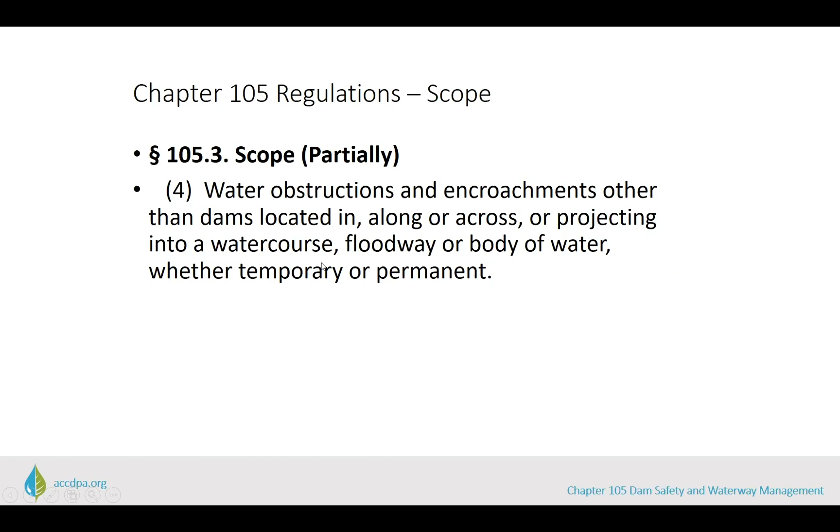So we've heard the term several times now. It's time to really get into the definitions. Water obstructions or encroachments: anything that would change the course, current, or cross-section of a body of water. All water obstructions are encroachments. Some examples are listed: culverts, fill, walls, etc.

However, the definitions and the regulatory scope also cover things that are strictly encroachments: excavations, clearing, grubbing, dredging. They're not structures or obstructions, things that take up space, but they do alter the normal stream morphology and change the course, current, or cross-section of a watercourse, floodway, or body of water.

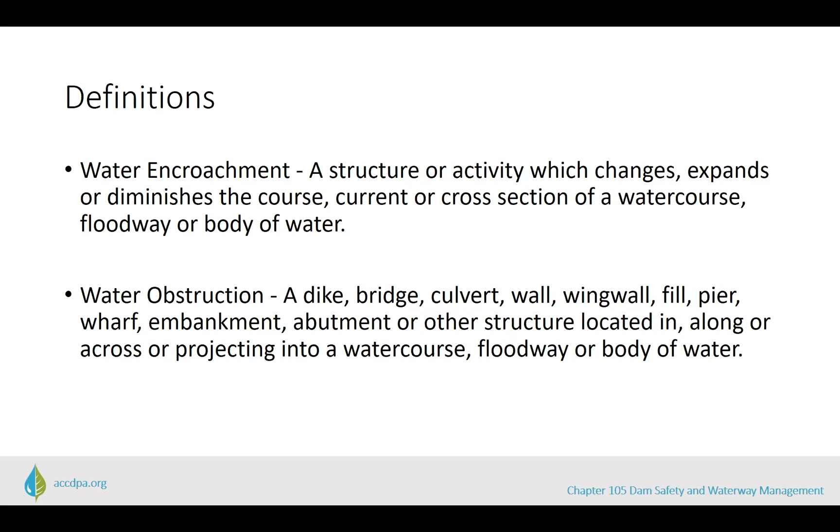More definitions. I often hear, and I'm sure my coworkers do too, 'I have a ditch on my property,' or 'there's a runoff channel along the road,' or 'there's a dry creek bed.' There seems to be a wide variety of views of what really constitutes a stream in Pennsylvania. But from the perspective of regulatory purposes, there is a definition of a stream. Chapter 105 has a one-word definition: watercourse. Watercourse is further defined as a channel or conveyance of surface water, having defined bed and banks, whether natural or artificial, with perennial or intermittent flow.

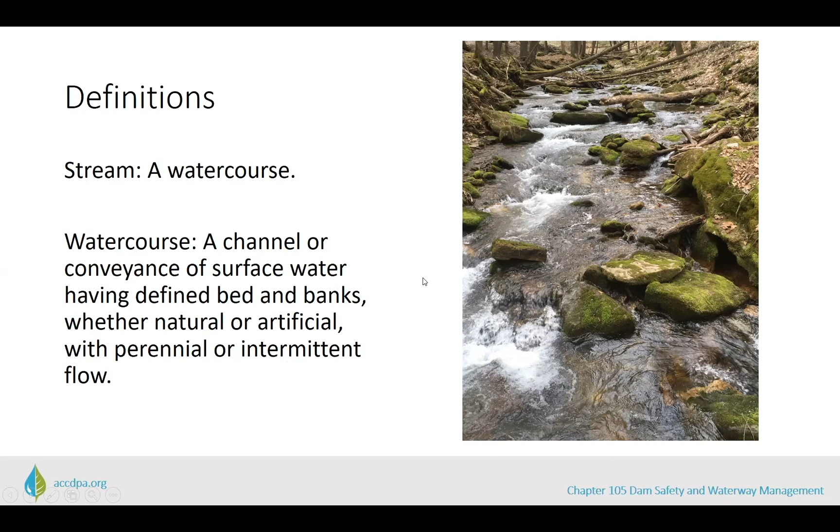I think we would all agree that the picture on the right, this higher gradient mountain stream, people would agree pretty much universally that that's a stream. However, these features are also streams per Pennsylvania definitions. There's defined bed and bank, conveyance of water. Maybe these are natural, maybe these are man-made. These aren't particularly aesthetically pleasing streams. They're not recreationally important or large, but they are streams per the 105 definition. Again, the regulated definition of streams is very broad.

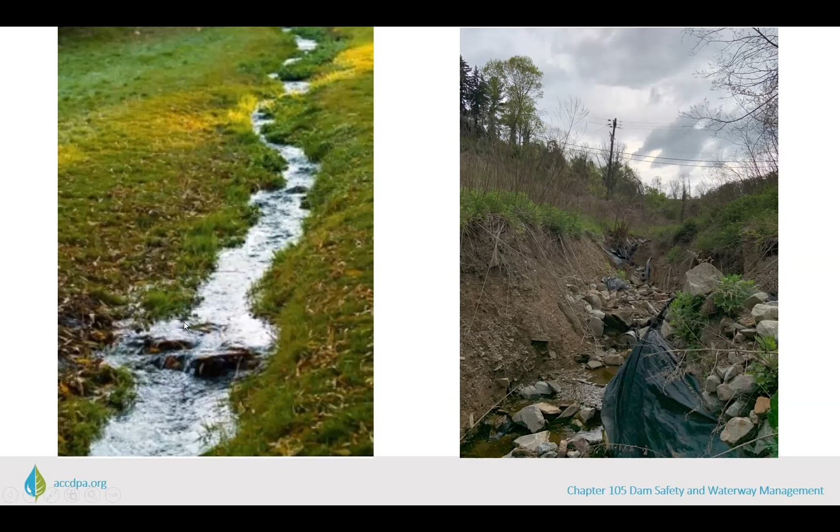Finally, last definition: wetlands. We often get questions on whether or not a property contains wetlands, or 'here there are some cattails in my yard, I don't think it's a wetland though.'

There are specific indicators and methodologies for determining if an area is wetlands that have been developed by the U.S. Army Corps of Engineers, and they're geographically specific. Western PA is in the Eastern Mountains and Piedmont region. Three specific metrics—soils, vegetation, and hydrology—are evaluated. A wetland area must have, under normal circumstances, positive primary indicators for all three of these metrics in order to be considered a regulated wetland area.

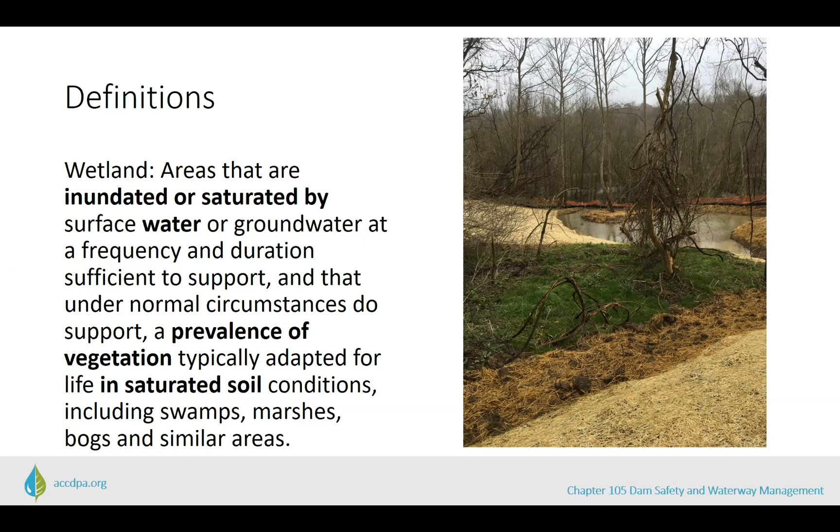This figure helps demonstrate the areas of a stream that Chapter 105 regulates: the channel itself from top of bank to top of bank, and the 100-year floodway. Any obstruction or encroachment in this area—anything that would change the course, current, or cross-section of that area—would be regulated by 105.

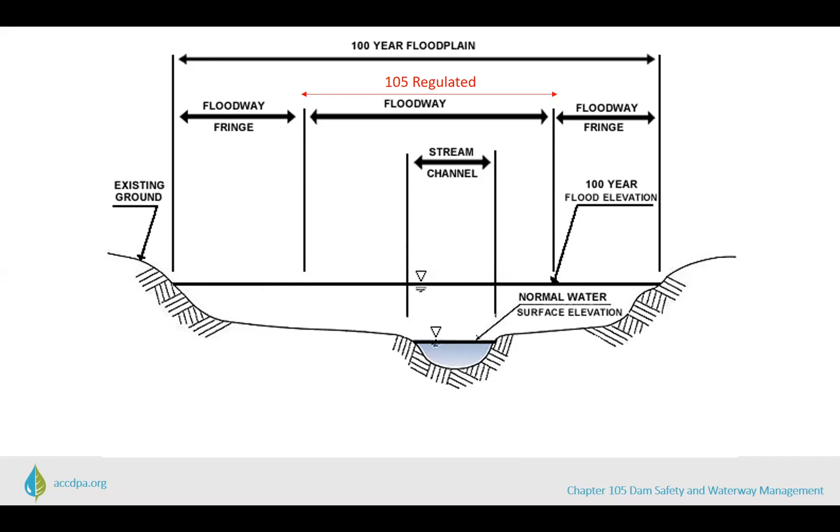Not shown in this diagram are wetlands, which are regulated regardless of proximity to a stream or flood zone. They can be upland, away from any other water feature.

Okay, so we've discussed scope, purpose, and definitions. Let's dig a little more into purpose. Why would the Commonwealth of Pennsylvania and the Conservation District, by the delegation agreement, regulate obstructions and encroachments? We'll look at the Conservation District 105 delegation through this more focused lens later.

So first, some quick review. The purpose of the regulations is to protect health, safety, and property of people, as well as water quality and environmental rights.

Dams are giant examples of water obstructions. Did you know that 2 of the 10 costliest dam failures in U.S. history have been in Pennsylvania? And they're not number 8 and 10 or something like that—in the entire United States, the number 1 and number 6 costliest dam failures have been in Pennsylvania.

The Johnstown flood in 1889 remains the costliest dam failure in terms of human life lost in the history of the United States. 2,200 people lost their lives and approximately $500 million in damage, in 2016 dollars. The site of the South Fork Fishing and Hunting Club Dam on the South Fork of the Conemaugh River is now a national memorial you can visit.

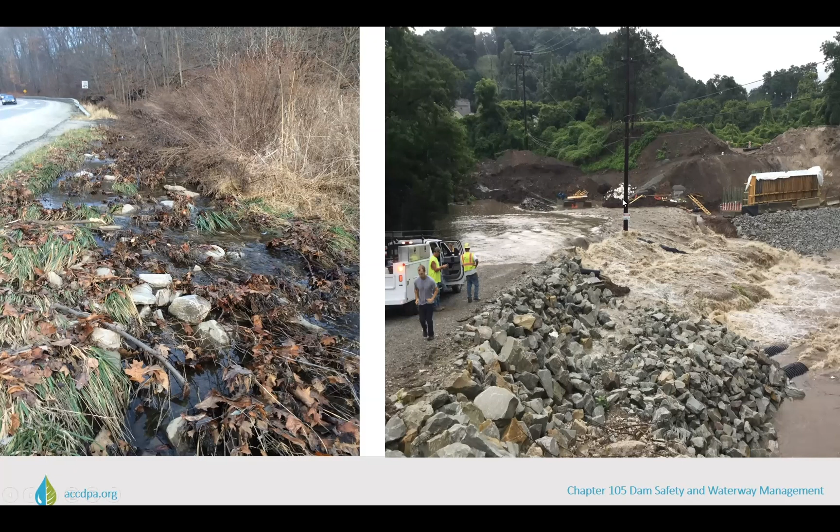As I mentioned in the introduction, the Conservation District has a delegation agreement with the State Department of Environmental Protection to administer certain aspects of the Chapter 105 program. Our current delegation agreement was signed in December of 2016. It's a formal document outlining responsibilities of ACCD and DEP. The state DEP maintains concurrent power and duties to conduct responsibilities of permitting and enforcement for delegated programs.

Essentially, the Conservation District's obligations cover three areas: permit reviews, complaint and permitted site inspections, and outreach and education. I'll spend the rest of the webinar looking over these three areas of our delegation agreement.

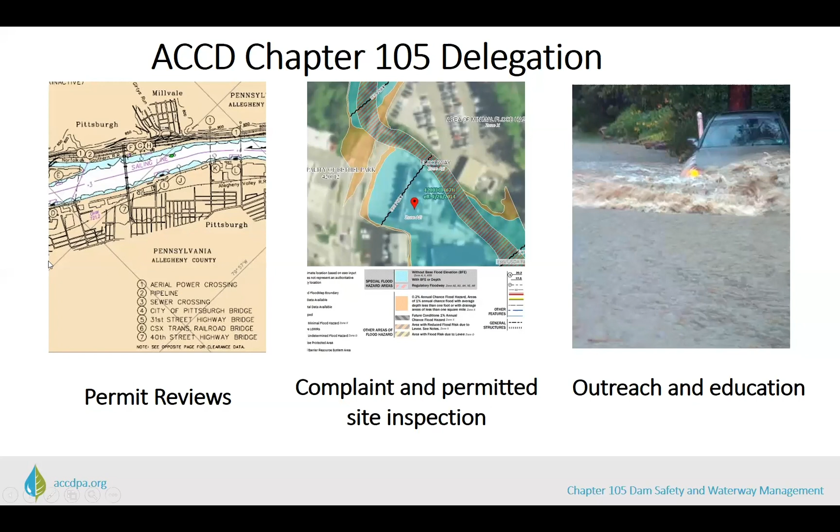We know that Chapter 105 regulates obstructions and encroachments. Under 105.11 permit requirements, broadly speaking, a person cannot construct, operate, maintain, or abandon a dam, obstruction, or encroachment without first obtaining a written permit from the department.

Water obstructions and encroachments come in a wide variety of project types: bridges, utilities, dams, docks, marinas, retaining walls, flood control projects, the list goes on and on.

The regulations are organized in subchapters that set forth requirements for different project types. For example, subchapter C covers culverts and bridges, with specific requirements for designing, permitting, and building culvert and bridge crossings. Subchapter I covers commercial dredging operations, with specific requirements for designing, permitting, and conducting extraction of sand, gravel, or other minerals within a river or 105 regulated area.

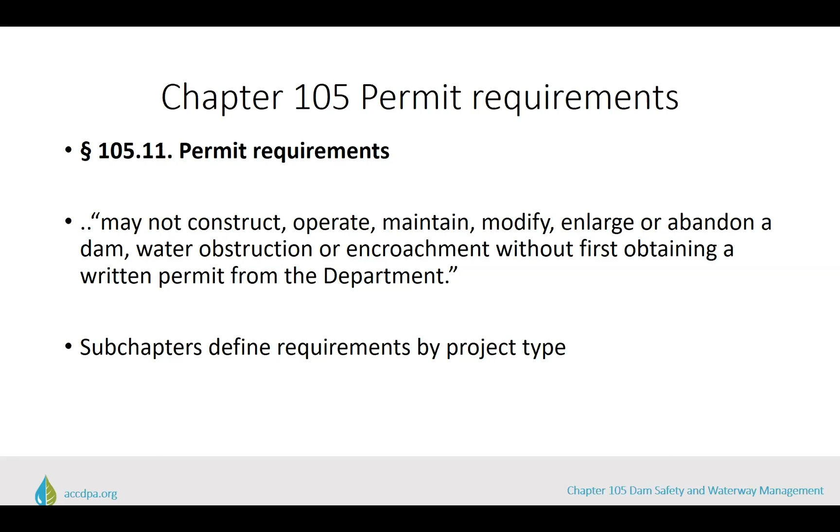The Harrisburg central office of DEP, the Bureau of Waterways, Engineering and Wetlands, Division of Dam Safety, reviews dam permits for the entire Commonwealth. Regional DEP offices, Bureau of Waterways, Engineering and Wetlands, review joint permit applications and certain general permits. In the joint permit with the U.S. Army Corps of Engineers, the Corps is the federal entity that regulates discharge of fill material to waters of the U.S. under Section 404 of the Clean Water Act.

We are in the Southwest Regional Office, headquartered in Pittsburgh, covering 8 southwestern Pennsylvania counties. Certain mining and oil and gas DEP offices will review 105 permits related to mining and oil and gas for their respective industries.

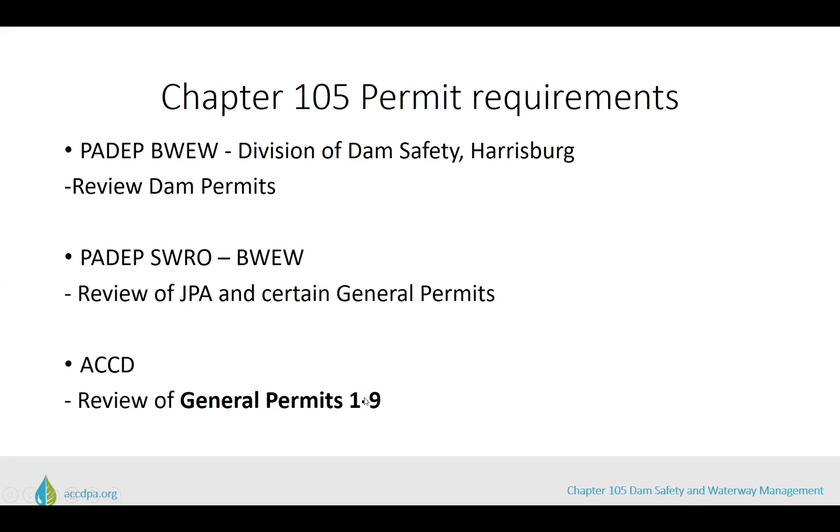Under our delegation, we review a subset of Chapter 105 general permits, general permits 1 through 9. Subchapter L outlines DEP's authority to develop and issue general permits for projects that are similar in nature and can be adequately regulated with standardized specifications and conditions. So to receive acknowledgement to use a general permit, an applicant provides information showing they meet all standardized specifications and conditions for a project to be covered.

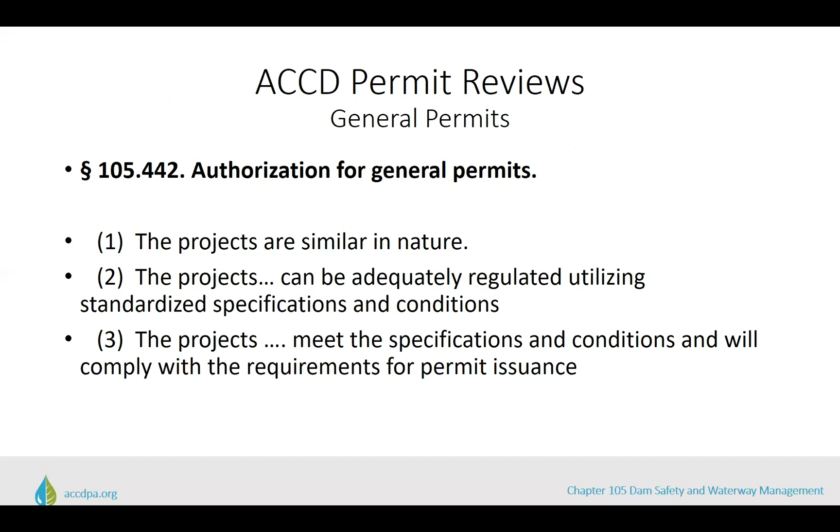Across all of these permits, some conditions apply uniformly. For example, all permits bar in-stream work from March 1st to June 15th in streams stocked with trout by the PA Fish and Boat Commission. The state, through angler dollars, spends money and invests in trout fishing opportunities, and permits bar in-stream disturbance during that time. Also, all permits require developing and implementing an erosion and sediment control plan, approved by the local conservation district, to minimize accelerated erosion during the project.

In addition to the uniform permit conditions, each individual general permit has specific conditions to the activity. For example, the GP5 utility crossing has a condition that for utilities placed under streams, they must have at least 3 feet of minimum cover from the top of the utility to the stream bed. In the event of a heavy storm and any down cutting in the stream bed, the extra cover provides a safety buffer so the utility isn't damaged by the storm. Also, environmentally, whatever is in the utility would not leak into surface waters.

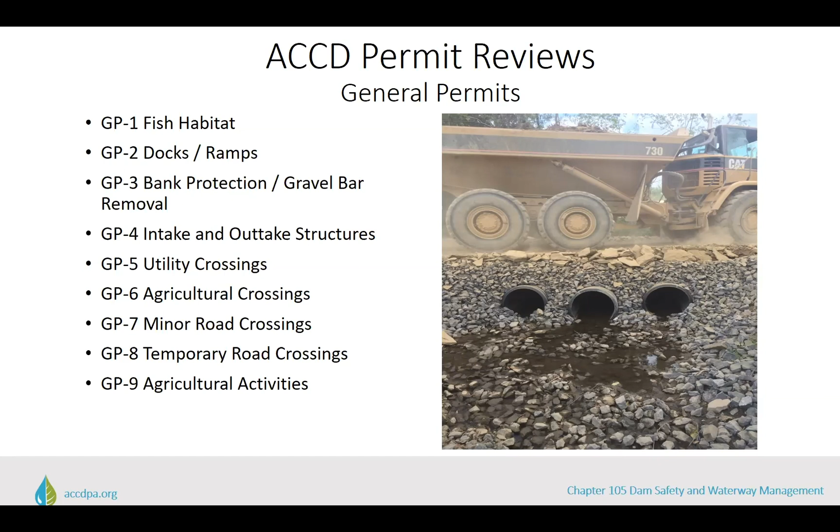Generally, the components of a general permit submission include an application form, location map, project description and purpose narrative, site drawings, E&S plans, and a threatened and endangered species search. If the proposed project were to impact wetlands, a wetland delineation must be provided.

So once received, once we get a permit package in our office, our reviewer would review the proposed activity, the drawings, the specifications, the cross sections against the standardized and uniform conditions to evaluate whether or not it could qualify for GP coverage. If it does not, the applicant must seek either a joint permit, another general permit, or a dam permit in some cases.

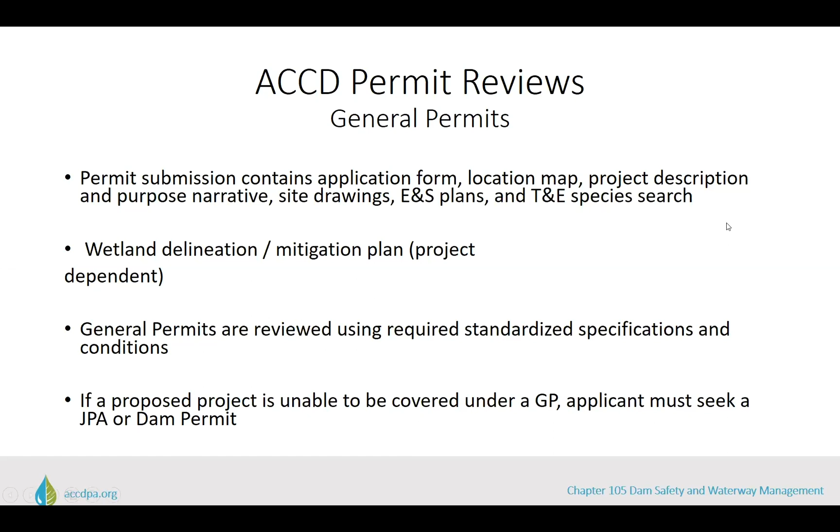The next part of our delegation I'll talk about is our complaint and permitted site inspections. During permitted site inspections, we're looking to make sure that the conditions are being followed, the E&S plan is being followed during construction. For complaint sites, we first have to evaluate whether or not there is any 105 violation occurring and what those violations are and detail them.

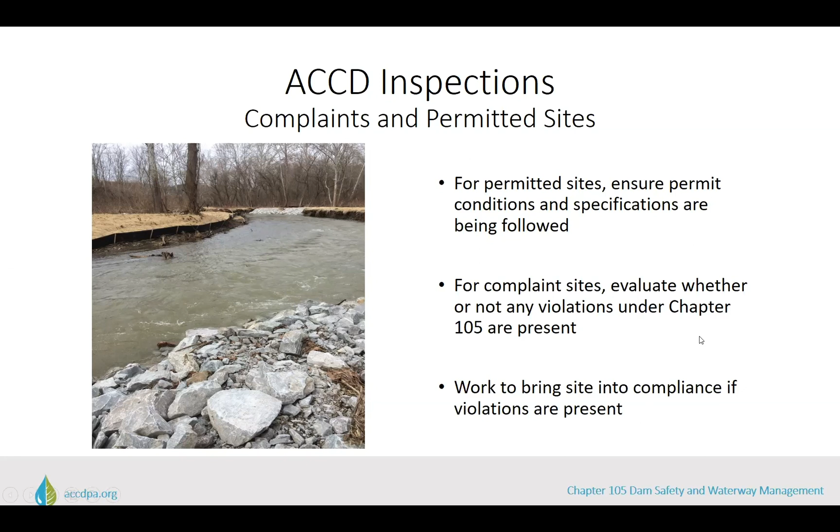If there were no violations in either case, we provide written notice with an inspection report stating as much. If there are violations, we provide written notice to the responsible party with a formal inspection report and work towards voluntary compliance to have the issues addressed. If voluntary compliance cannot be reached, we work with the regional DEP office on various enforcement strategies to bring the site into compliance. I'll just walk through a few examples of 105 inspection sites that our office has been involved with over the years.

This was not permitted. We wouldn't permit something like this. Somebody proposed this, it wouldn't pass muster. It is an obstruction, right? It's right in the stream channel and it's causing property damage, the parking lot and building, safety and environmental issues. So we did an inspection, met with the owner, and explained their obligations, gave them a written inspection report detailing compliance measures.

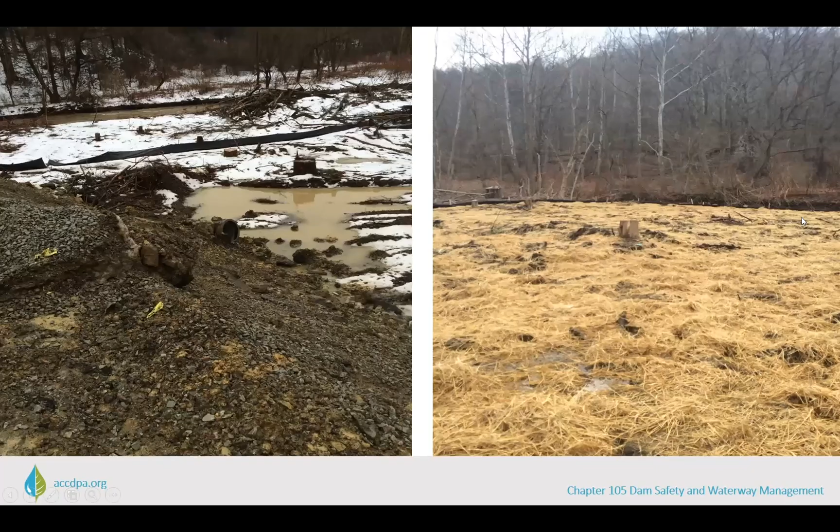This is another complaint, but an entirely different project type than the last example. In this instance, a property owner cleared a substantial amount of land located in the floodway and floodplain of a large stream in Allegheny County. The intent was to fill the floodplain and floodway to grade with the road. I'm standing on the road in the picture to the left looking towards the stream.

Fill was being end dumped. The idea was to fill that whole area up to the stream. At the end of that, there's a building pad for development next to a busy road.

Similar to the last case, there was no permit obtained. Although it's not in the stream, remember 105 regulates 100-year floodways as well, and the fill is an obstruction of the 100-year floodway, so that gives us a regulatory hook. Also, clearing and grubbing up to the edge of the stream is an encroachment activity and regulated by 105.

The clearing and grubbing raises clear pollution concerns, loss of riparian habitat, some environmental issues, and public safety and carrying capacity of streams concerns. This was going to be thousands of cubic feet of floodway and floodplain filled in, which means that during flood conditions, floodwater energy cannot dissipate. It would negatively impact other properties.

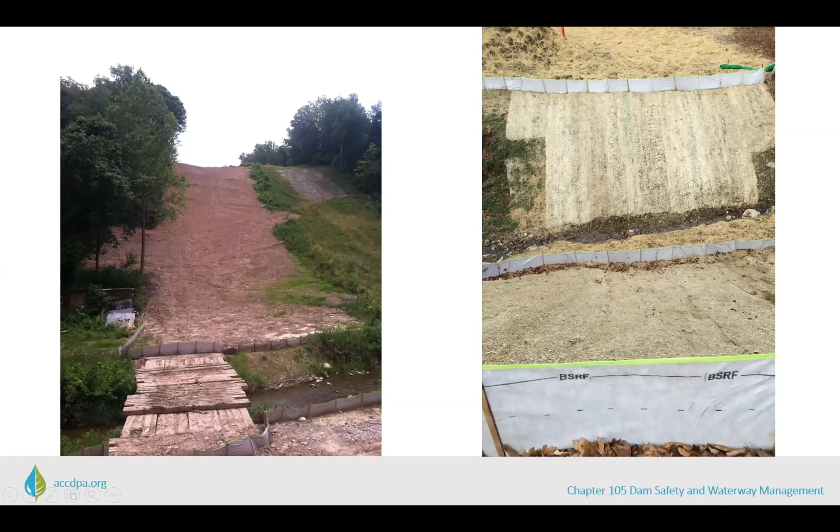Finally, our office performs outreach and education under our delegation. We accomplish this in a variety of ways. First, we have staff invited to speak at a variety of other organizations, events, and conferences. For example, staff has spoken to local university students, trade groups, sportsmen's groups, nonprofits, and municipalities on 105 related topics.

In our office, we maintain pamphlets, fact sheets, and handouts for public information and education, and they're also available on our website, accdpa.org. I'd invite and encourage everyone participating to peruse our website.

We're currently building out a digital materials section for our regulatory delegations. These can be found under events and education, resources, regulatory resources. Currently, we have 4 recorded webinars and presentations and 6 fact sheets and permitting guides available. We're going to continue to build this resource in the months and hopefully years to come.

Annually, we hold a 2-day E&S workshop, with day 1 for developers, designers, and engineering consultants, and day 2 for construction contractors that work on these sites and permits. While the workshop primarily focuses on our NPDES and 102 erosion control programs, the audience for our 105 regulatory program is substantially similar in the development community, and each day we include several dam safety and waterway management focused presentations.